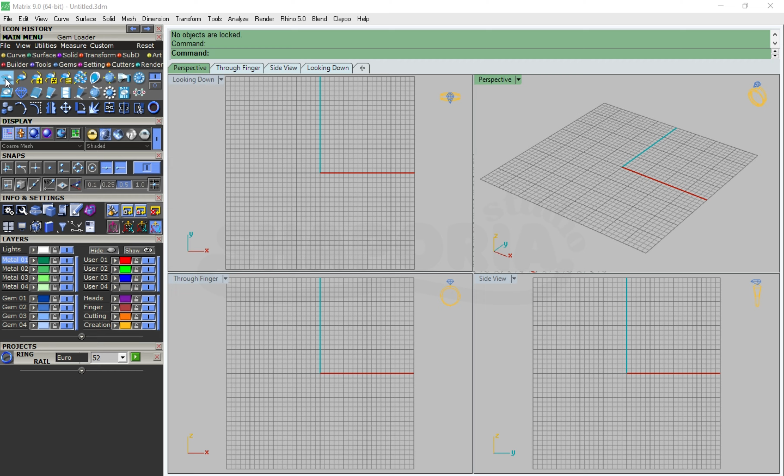Hi everyone, welcome. In this video, we're going to go through the 3D design process of a four-prong ring setting using Matrix. I decided to create this tutorial because four-prong settings may look simple, but if the design principles are not respected in 3D, they can cause serious issues later during casting or stone setting.

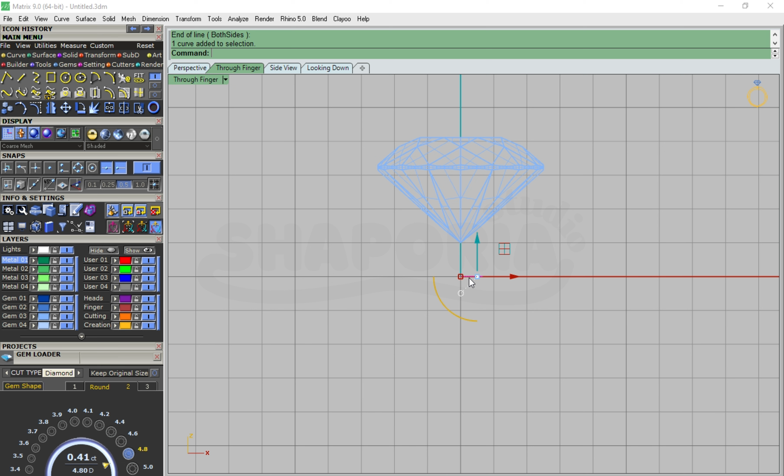In Matrix, the first thing we focus on is perfect prong symmetry. All prongs must be fully centered on the stone and aligned precisely along the X and Y axes. To achieve this, I usually use polar array or mirrored copies to make sure the spacing between prongs is perfectly even.

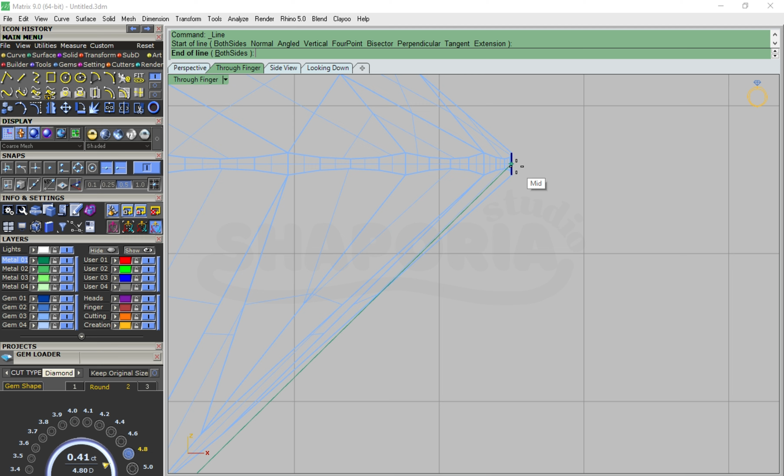The second key point is prong dimensions and thickness. The base thickness, prong height, and tip diameter must be defined according to the stone size, strong enough for durability, but not so heavy that the design loses its elegance.

Next, we move on to the stone seat. When designing the seat, the depth, contact angle, and stone alignment are critical. I usually use the gem cutter tool or manually adjust surfaces to ensure the stone sits level, secure, and without unnecessary stress.

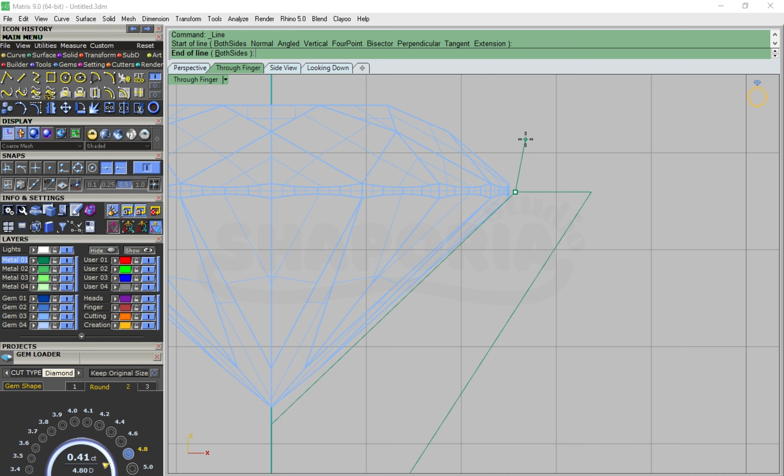Finally, we consider manufacturing tolerances, the required clearances for casting, polishing, and stone setting. This step is often overlooked, but it has a major impact on the final production quality.

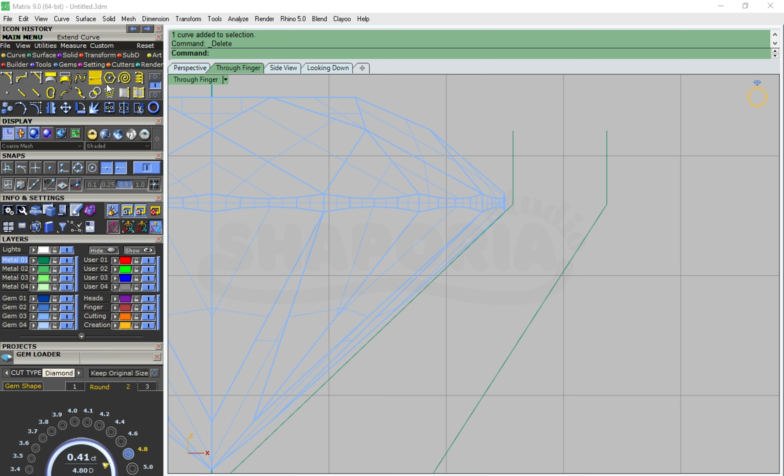In this video, I'll show you step by step how I designed this four-prong setting in Matrix, which settings I use, and how I avoid common design mistakes that can cause problems during production.